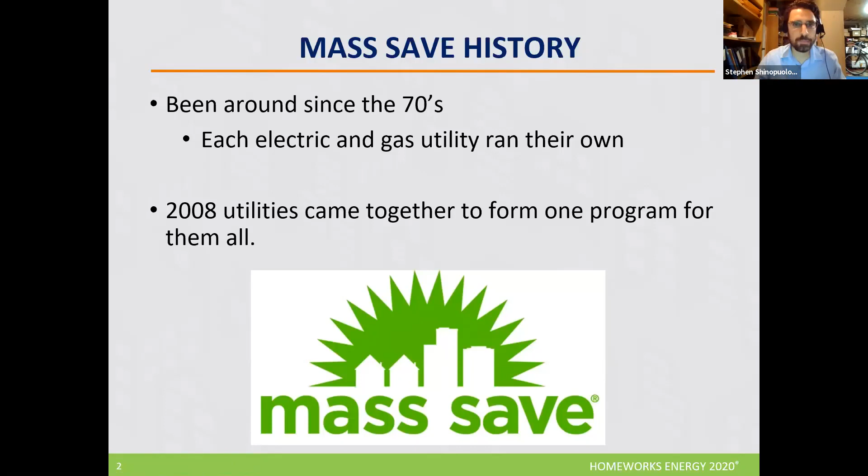As an overview of Mass Save, it is a state mandated program, sponsored by utility companies. Some of the biggest players in the program are companies like Eversource, National Grid, and Columbia Gas, as well as some other companies like Berkshire and Liberty.

Now, there's often questions about where the funding for this program comes from. Mass Save is funded by a charge on our utility bills in the state. So for those of us with National Grid, for instance, or Eversource, there's a charge on the bill called the energy efficiency charge, which is at the bottom of the bill. That's what funds the Mass Save program. It's about 5% of the bill. That's what funds the program and allows us to perform no-cost home energy assessments throughout the state.

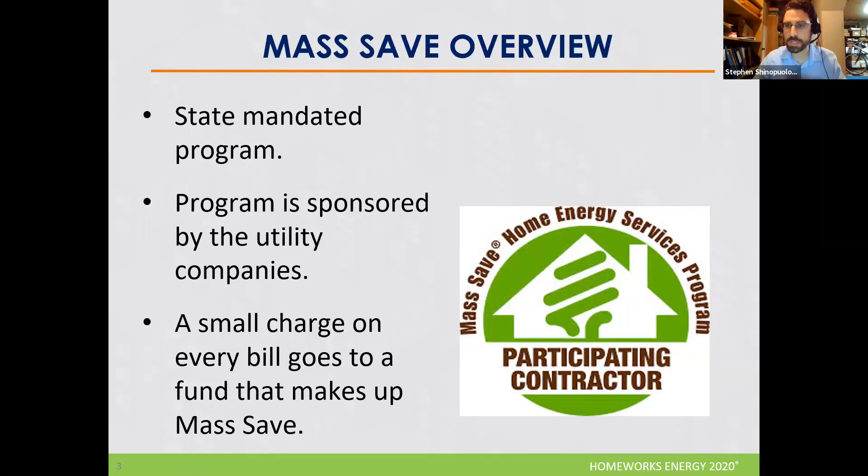A little bit more about Mass Save: there are several programs in the Mass Save umbrella, as we call it. My domain is in the home residential side, meaning single to four family properties, and as I said, we work with National Grid, Eversource, and Columbia Gas. There are also chapters of the program that deal with larger multifamily buildings, as well as commercial. These are not aspects of the program that we handle in-house, but we work with other contractors to support those needs when they arise.

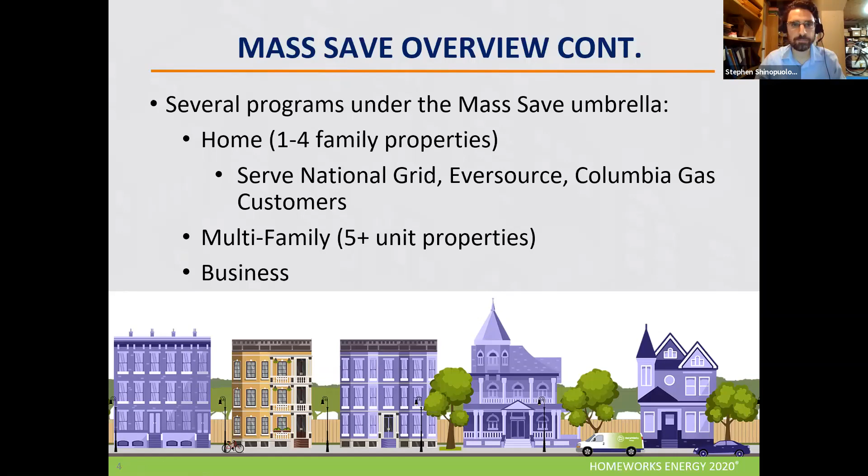Okay, so the basics of what we do in Mass Save is offering Mass Save home energy assessments. We offer the standard home energy assessment, which is a comprehensive look at the home to see how folks can reduce their energy usage, make the home more comfortable, and save money throughout the home.

Now, it's a unique time we're in, unusual circumstances. So the program has adapted to offer virtual home energy assessments as well. It's the same fundamental process, just done via picture, phone, and video chat. It just allows an alternative way to take advantage of the program if folks have circumstances that might prevent somebody from coming into the home right now.

One of the primary aspects we cover in the home energy assessment is weatherization and insulation work. We try to cover that from top to bottom of the house. I'll go into that in more detail, but that's one of the main rebates available through the state program, and one of the easiest ways to reduce your energy usage at home.

We also do heating and cooling work. I'm not going to go too much into that tonight because we have another presenter who's going to focus on that specifically. But if anybody is interested in Mass Save rebates on that matter, you can just go to masssave.com to look more into that.

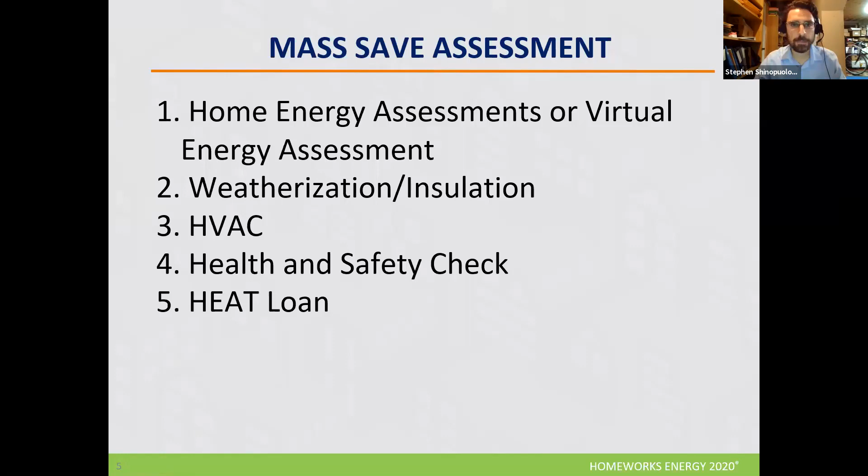Okay, so standard home energy assessment. It's a comprehensive inspection and review of a home's energy performance, a top to bottom look at the home. We typically start in the basement or where the primary heating source is, and perform what's called a combustion safety test to make sure the heating system is working safely and efficiently.

We look at the insulation in the basement, typically the basement perimeter, the rim joist or the sill, and we will insulate that to stop air from drafting into the bottom of the house. Now we move through the house and also inspect the walls and the attic for insulation. Those are two of the other typical areas we'll look at, where there are substantial rebates to reduce our energy usage at home and make it more comfortable.

Part of the assessment is also what we call instant savings measures, things like LED light bulbs, programmable thermostats, smart power strips, and water saving devices like shower heads and aerators. Those are installed at the time of the assessment and included at no cost through the state program.

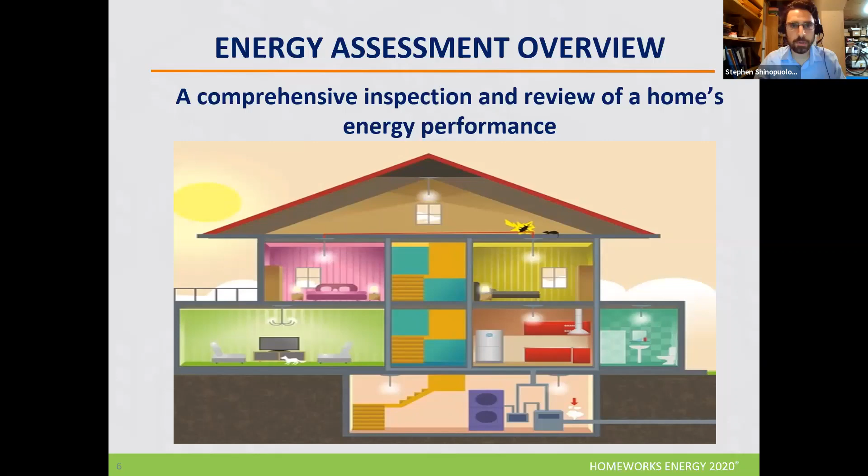I want to mention, since we have a specific audience tonight that might be interested in what the program can do for older homes common in Massachusetts. Of course, older homes had less insulation than building code requires today. The building code started to change in the 70s and 80s to where it is today, substantially greater than it used to be.

When we work with older homes, we often take note of what we call pre-weatherization barriers. That might be knob and tube wiring, which is the original kind of electrical wiring used; structural integrity of walls, which I'll touch on more in a moment; water damage, which is never good news for a home; and things like asbestos, which is another issue we'll take note of.

I mentioned wall work a moment ago, and it's particularly important to note for older homes, because that's the one area that's really on a case-by-case basis. Many aspects of the program are very easy, low-hanging fruit so to speak. Wall work is more case-by-case, where we'll take due diligence to make sure we're confident in the structural integrity and that the walls can be properly insulated. The program will also help with single pane windows, financing particularly, if folks are interested in that.

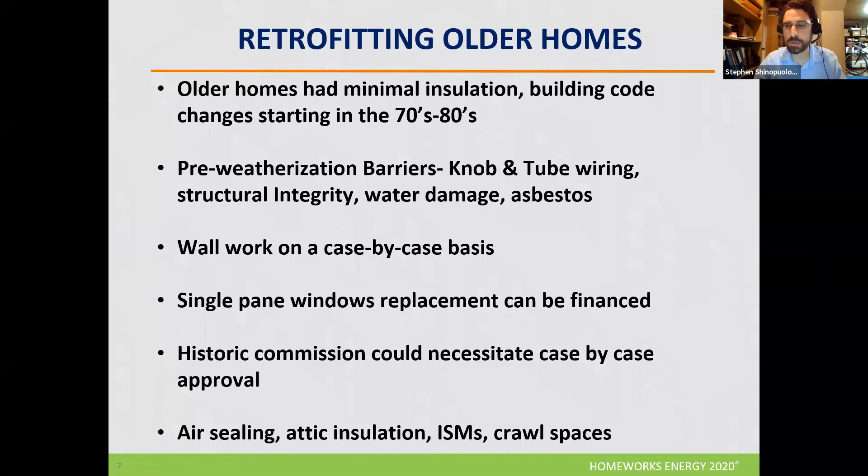Combustion safety, as I mentioned, is the first step of a home energy assessment. This is just testing the primary heating source of the home, so whether it's a forced hot water boiler or a forced hot air furnace, we test that. We test the domestic hot water system, and if there happens to be a gas stove, we test that as well, just making sure they are working up to standards and running smoothly.

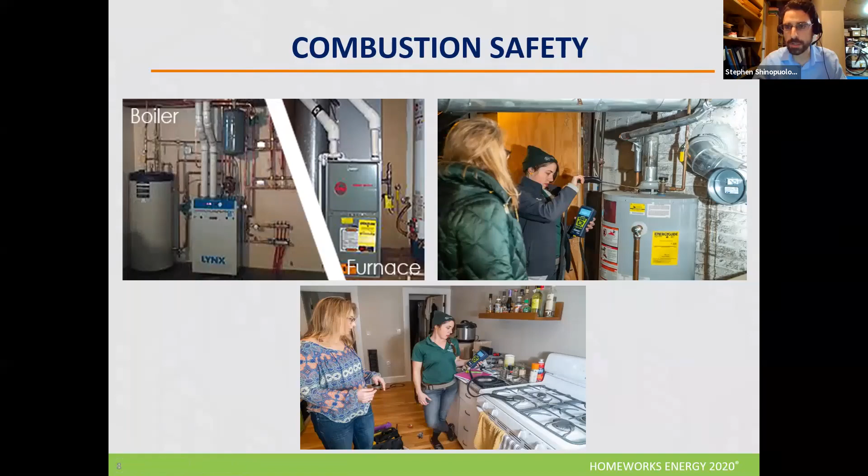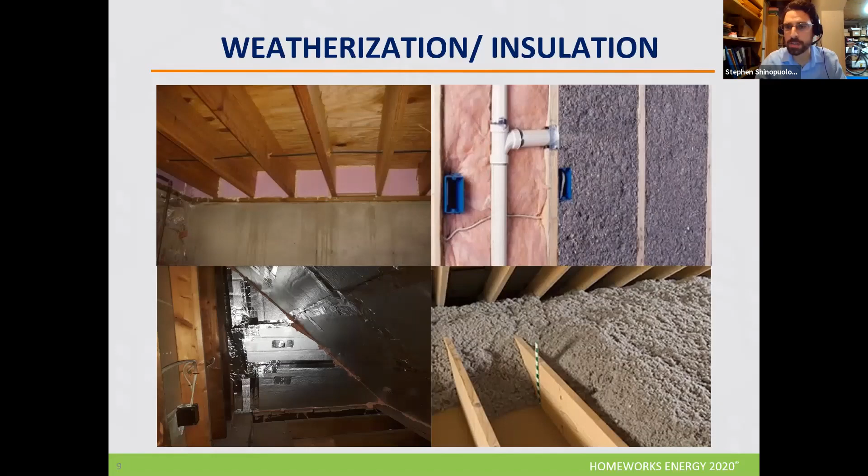I just mentioned that the program is currently covering up to 15 inches of insulation in the attic. This on the left side is somewhat typical of an older home that you might find in New England, with spotty partial insulation, and the program is just going to take that and update it to a nice fresh coat of 15 inches to maximize the R value in the attic.

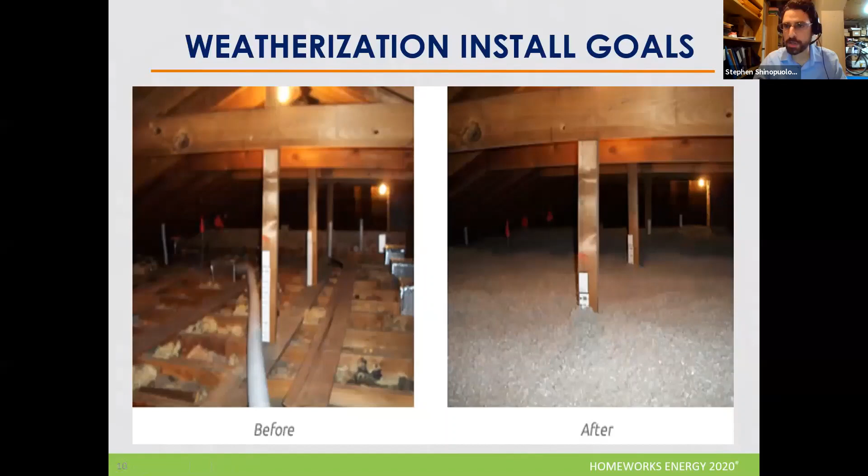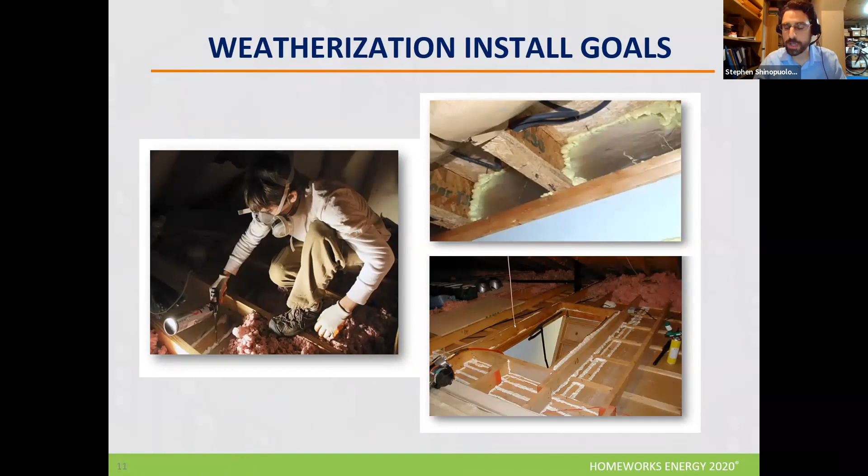Here, as part of the installation process, is targeted spray foam. We like to use the analogy of winter clothing pretty often. If you think of traditional insulation like fiberglass or cellulose as your winter sweater, targeted spray foam is kind of like your windbreaker. So the insulation stops your conduction, and this targeted spray foam stops convection, cold air moving through the home. So we're sealing up the top plates, we're sealing the perimeter, the rim joist of the basement, and just reducing that airflow as much as possible.

And part of the process, of course, is doing health and safety checks throughout the home.

So these are some of the examples of pre-weatherization barriers that I mentioned earlier. In the top left, we have mold, which is often a result of water issues in the attic or other parts of the home. Top right, we have knob and tube electrical wiring, which is the original form of electrical wiring that was used. It's still perfectly functional, but it can pose somewhat of a fire hazard if doing insulation work.

In the bottom left, we have vermiculite, which is a natural and pretty effective form of insulation. But it was found that where they were mining vermiculite from sometimes had asbestos laced in the rock, the ore area.

So we treat vermiculite as though it has asbestos in it. Now, all of these things I just mentioned are what we call pre-weatherization barriers, and we take note of those and make recommendations for how to remediate them and move forward when needed.

I left this one independently because it's a little different, and everybody at home is probably unfortunately familiar with ice dams to one extent or another. Ice dams are a bit different than the other three I mentioned. Fortunately, they can typically be remediated or improved dramatically by improving insulation, because ice dams form when hot air escapes during winter, melts snow, and it refreezes due to the cold air outside. Insulation reduces that heat loss through the roof and therefore helps with ice dams.

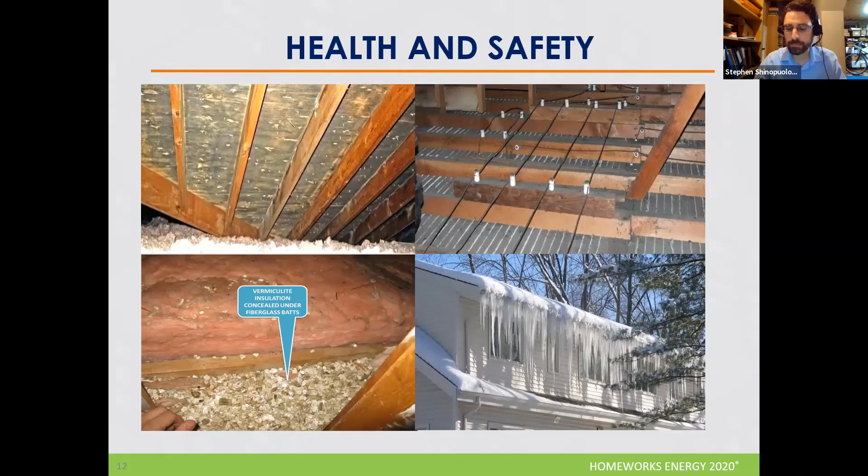So these are the instant savings measures I mentioned earlier. During a home energy assessment, we install new LED bulbs in place of older incandescent bulbs, and we cover pretty much everything from the bulbs in your refrigerator to the outdoor floodlights. We get on the ladder and swap those. We have almost every bulb you can think of, including three-way bulbs, globes, candles, pretty much the works.

The top right and bottom right show our water saving devices. I've personally performed an energy assessment at my own house, and I shower with the MassSave shower head every day and quite enjoy it. It has very high pressure.

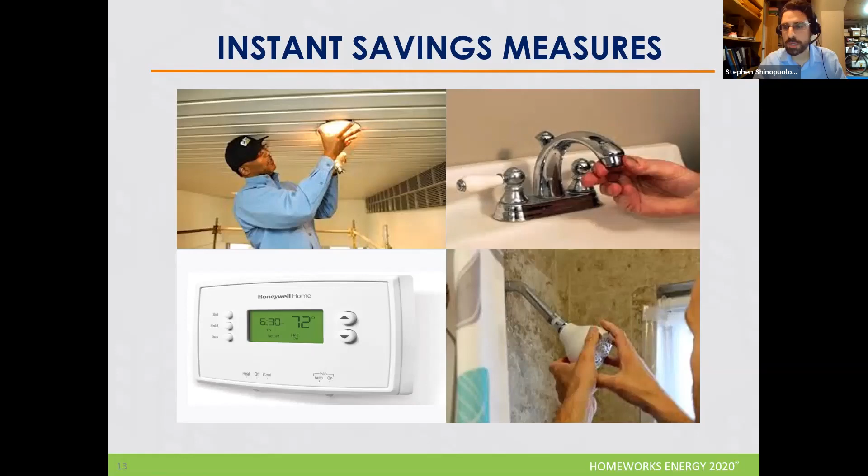And in the bottom left, we have our programmable thermostat. This is a standard Honeywell programmable thermostat included at no cost through the program, and we also install it during the assessment. These can be set on a timer, so it can kick on and off at desired times of the day, helping to reduce energy usage and keep things on a nice schedule when desired.

Moving forward, this is the report for the instant savings measures. This is actually from an assessment I did at my parents' house last year, so this is the ISM receipt from auditing my family's house. I won't go through it item by item, but this is presented at the end of every visit and sums up completing the visit itself. In this case, I installed a new thermostat, aerator, shower head, and a bunch of different light bulbs. This is always provided at the end of assessments.

And in this case, it was almost $500 in value. It's always a $0 receipt, always paid for by the program, and it calculates the estimated savings on an annual basis. This is an average calculation. So for my parents, it was able to save them about $200 a year, give or take.

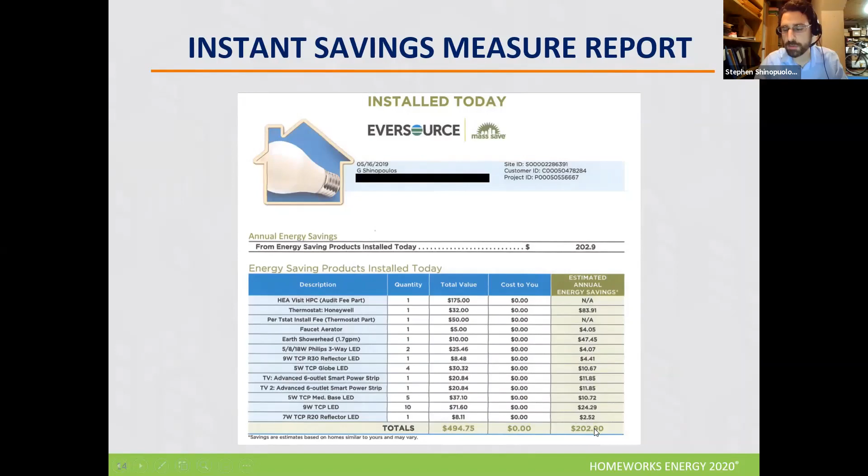This is another assessment I performed last year, showing an installation recommendation through the program. The program breaks it down into two categories I mentioned earlier: air sealing and weatherization. Air sealing, in addition to targeted spray foam, can also include things like door sweeps and weather stripping for exterior doors, a stair cover for those with pull-down staircases, and of course the air sealing itself. This is covered at 100% by the state program.

In this particular house, it was about $950 value of air sealing. It's always no cost to the homeowner for the air sealing aspect of assessments. You can see the estimated annual savings, which this homeowner was going to save about $175 annually from the air sealing measures.

The second portion of the recommendations is the weatherization work. This includes things like insulating the walls when appropriate, adding insulation in the attic, and this one also included some rigid foam board for certain portions of the home.

This portion of the work is covered at 75% typically. You can see it was about $2,800 for the homeowner, the state throws in 75% of that, and the homeowner was left with a 25% copay, or $710. It also calculates the estimated annual savings for this weatherization work and the estimated return on investment. So this homeowner was looking at about 1.4 years to realize the return on their investment, and just at that point be saving money from having that work done.

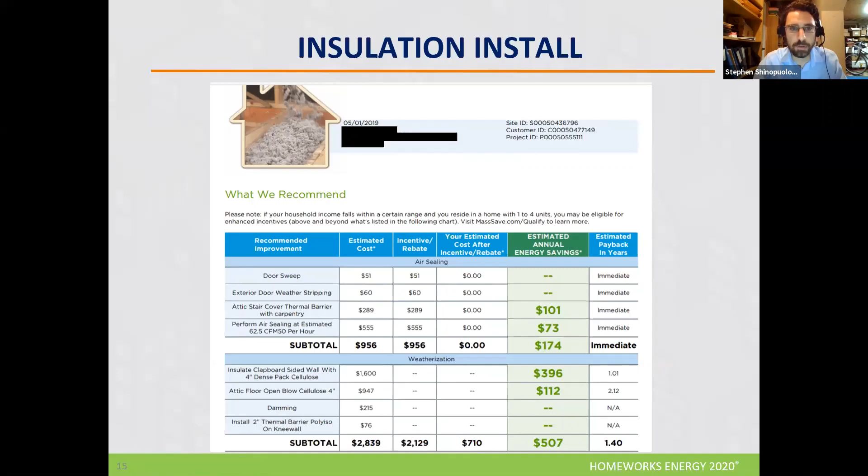At the end of the home energy assessment, we go over our report and findings with the homeowner. Of course, every house is unique, so we address any unique circumstances found in the home, all of our recommendations, what the homeowner can do to improve the efficiency of their home, and how to move forward with those recommendations.

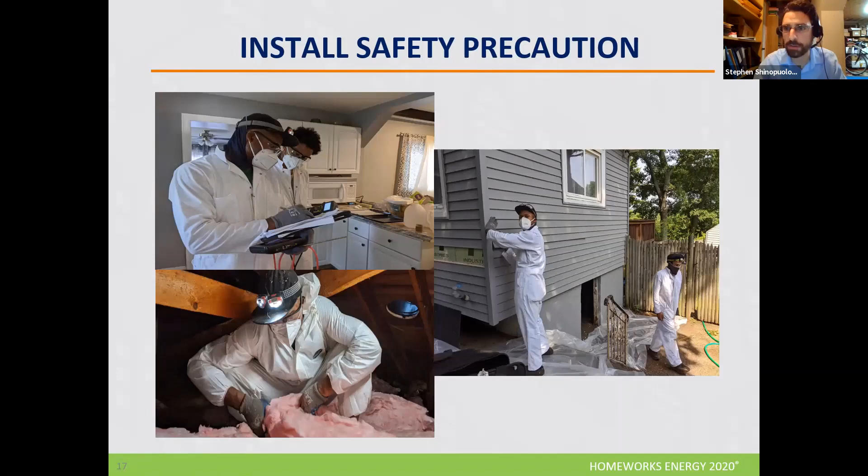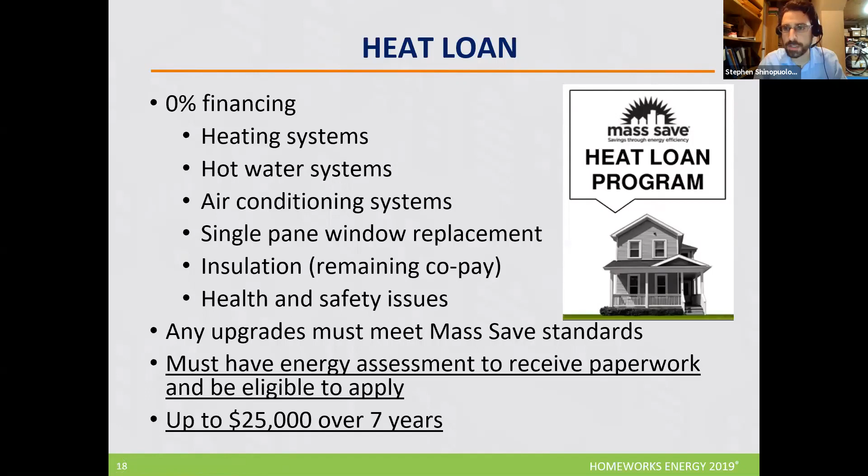To sum up the advantages of the program and why people do this so often—people have different reasons, but one benefit for everybody is that it saves people money across the board. It's pretty typical to have a return on investment of just 1 or 2 years because of the state rebates.

It certainly doesn't hurt the finances a little bit. Moving on, it's also going to help comfort—a better insulated home will be warmer in the winter and cooler in the summer. That's the comfort aspect of the assessment and the work we do.

It's also, of course, helping to be green. If we're using less energy and less heat, that's going to have a lower carbon footprint and improve the environmental impact of our homes.

We also address health and safety issues, so it's a comprehensive look at the home. We pay special attention to health and safety concerns to cover all the bases.

It's also an important form of preserving homes. We're weatherizing them and reducing airflow throughout the home, which helps preserve the home in the long run and gives it greater longevity.